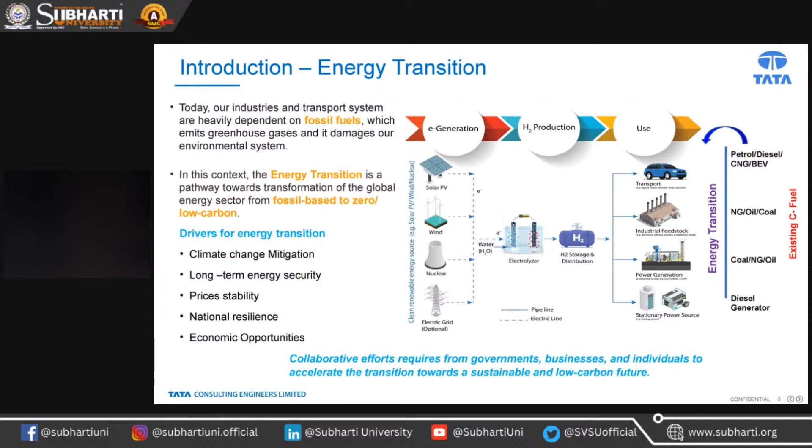So what are the motivations for the energy transition? For example, climate change mitigation; everyone is currently experiencing climate change, so mitigation can be done by energy transition. Long-term energy security, price stability due to geopolitical issues, national resilience is also one of the key driving factors for energy transition, and economic opportunities for domestic growth. These five key parameters are enabling the energy transition.

Here is the key approach for energy transition. Now we understand what energy transition is. What are the key pillars for the energy transition? For example, increase the energy efficiency of the existing energy system, one of the opportunities to reduce our existing carbon fuel. Or, increase renewable energy, for example solar photovoltaic, wind energy, hydrothermal. If we increase this kind of energy, carbon fuel will be reduced.

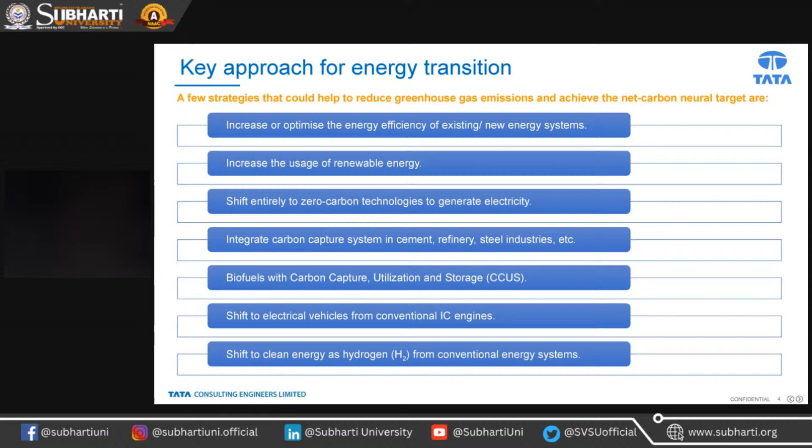Currently our electricity generation is coal-based, thermal-based, or combustion-based, so we should shift to zero carbon technologies. Then, for example, in the cement industry, refineries, and steel industry, plenty of process carbon emissions are happening. That could be captured. Biofuel, with carbon capture, is one of the approaches. Electric vehicles are preferred compared to conventional IC engines with diesel or petrol. Shift to clean energy such as hydrogen. These are the key pillars, the key approach for energy transitions.

Next slide. This is India's target. Whenever we are doing research or contributing, we have to understand what the current problem is and what our target is; then we can initiate our research. In the last two slides, we have seen what energy transition is overall, what the key pillars are, and now, according to the key pillars, what the Indian targets are.

As per the Indian targets, India's 2030 decarbonization target was announced at COP26. The highly ambitious goal includes decarbonizing energy to 50 percent, achieving 500 gigawatts of fossil fuel free generating capacity by 2030. These are the committed targets, but right now we are not near this target. I will explain in the other slides how we are doing.

So we need non-fossil fuel energy of around 500 gigawatts by 2030 to meet 50 percent of the energy requirement with renewable energy. 5 million tons per annum of green hydrogen is needed by 2030. Reduce projected carbon emissions by 1 billion tons by 2030, and reduce the carbon intensity of the economy by 45 percent by 2030, to achieve the net zero ambition for greenhouse emissions by 2070.

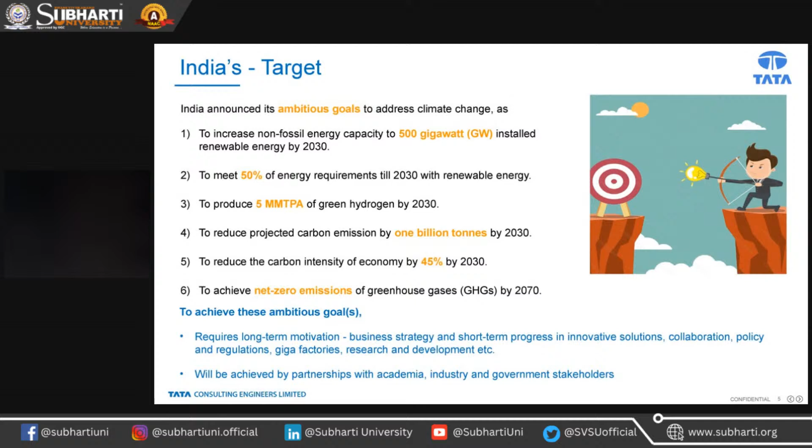These are all the 6 targets India committed to at COP 26. If we want to achieve these goals, we need massive research, collaboration and industrial implementation. So based on this motivation, we will go one by one through how to achieve these things.

So energy transition: now I'm dividing up what technologies are available for energy transition. To achieve the targets I showed in the previous slide, what approaches will there be? These are the approaches we can consider. The first approach is renewable energy, for example solar, wind; nuclear is also considered a clean energy.

Energy storage: batteries, pumped hydro storage, compressed air; green hydrogen through water electrolysis; smart grid; electric vehicles; energy efficiency technologies; CCUS; then advanced nuclear power like small modular reactors; biomass with CCUS, gasification, pyrolysis, transesterification.

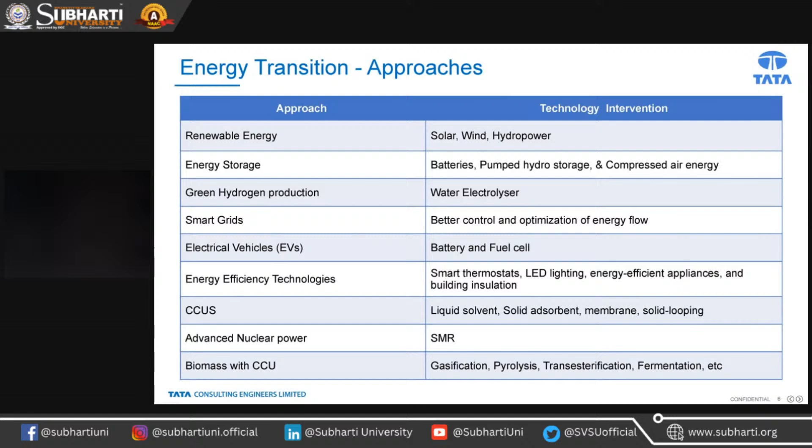See, this first column shows the approach. The second column shows the technology intervention, what technologies are helping us move further toward energy transition. Now that we understand the approach and the technology intervention, we'll go one by one.

For example, we can take solar energy. If you understand the first slide, the next 10 slides I'm going to show in this fashion. First understand the template of these slides, so it's easy to track me. First is the technology: what technology is current? Cell technology or panel technology.

In cell technology there is silicon; most solar cells are developed with silicon and are commercially available. Thin film is also available. Perovskite is under research; some universities are developing it, but it's not at the commercial stage.

So what are the current trends and advancements we should understand in this technology? First, increasing efficiency: it usually improves with research and development efforts focused on enhancing light absorption, reducing energy loss, and exploring new materials. This enables more electricity generation from a given surface area.

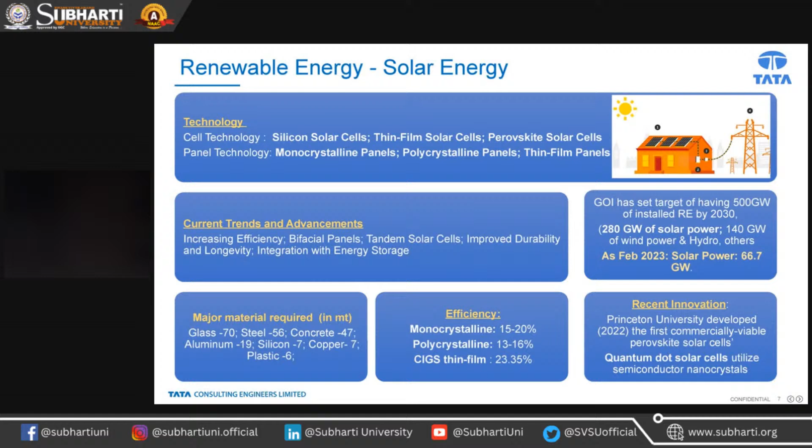Next is wind energy. We have similar technologies: onshore wind, offshore wind, and floating windmill. Types include vertical axis windmill and large three-blade horizontal axis. These are various types of turbines we can use for this technology.

Current trends for windmills: larger turbines, improved efficiency, floating wind technology - these are the preferred current technologies. A small windmill may not give that much efficient operation, so larger turbines with improved efficiency are preferred, along with floating wind. Also integrated energy storage, digital and remote monitoring are enhancing efficiency. This is the current technology for wind.

Currently, as I said, 140 gigawatts is the proportion target, but right now we have only 42.8 gigawatt - this is our current status. However, we have a lot of opportunities to increase that proportion as soon as possible, because many projects are already under construction or in engineering stage. So by 2030, we hope we can reach around 500 gigawatt.

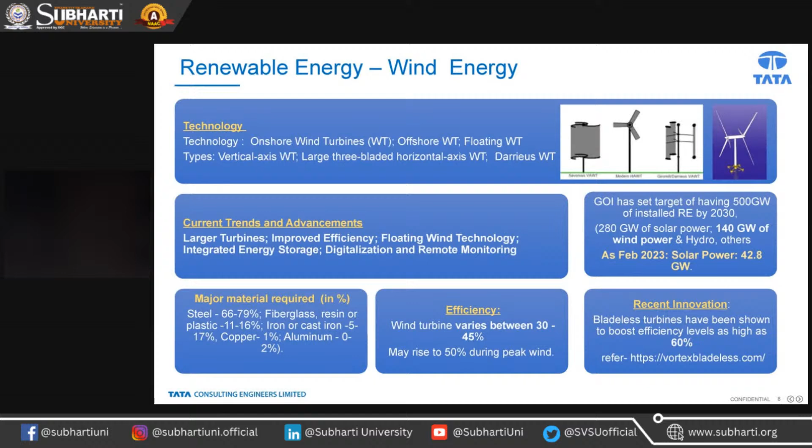Next is batteries. As you know, there are several batteries used industrially for backup power. There's superconductors, pumped hydro storage, compressed air storage, flywheels, thermal energy - these are various technologies for energy storage. But currently we are talking about only batteries; I'm not talking about superconductors, pumped hydro, hydrogen, or flywheel. Here I'm focusing on energy storage as battery.

The types of batteries we can consider: lithium ion batteries, which we mostly use, solid state battery, and flow battery - three types of batteries currently available. The current trend is that lithium ion batteries are trending, but we need a higher capacity device, which includes developing new electrode materials, silicon anodes, high capacity cathodes, and optimizing electrolyte compositions. These are the trends.

India will have battery storage potential of about 600 gigawatt hours by the 2030s - this is our demand. But what are the potentials in research and innovation? Opportunities include liquid electrolytes and solid state electrolytes. Currently we are using liquid type electrolytes for batteries, but converting to solid state electrolytes is a good opportunity from a research perspective.

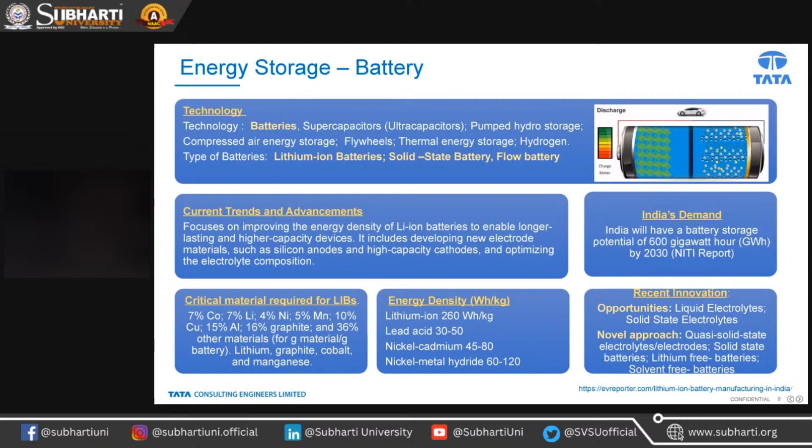Regarding energy density, for theoretical understanding purposes: lithium ion is 260 watt hour per kilogram, lead acid, nickel cadmium - these are the range of energy densities. So these are about energy storage for batteries.

Water electrolysis for hydrogen energy production is also one of the emerging technologies. The last 3-4 years have seen this taken up across all the industries.

They are putting installation. Currently, globally, we can say 300 gigawatts of electrolytic hydrogen production from these methods. For example, these are the technologies: alkaline, proton exchange membrane, anion exchange membrane, solid oxide. These are all technologies almost parallelly maturing, except the anion exchange membrane.

If you want to do alkaline water electrolyzer, around 60% of industrials prefer it for large ammonia production or any standalone large industrial requirement. For small requirement, proton exchange membrane electrolyzers will be used for smaller scales. That's also 40% contributing to current commercialized things.

Anion exchange is at lab scale. We need a lot of potential research on that. Many groups are working on it. Solid oxide electrolysis is also one of these. All four technologies have some merits and challenges, but it will be overcome by recent research. Current trends of advancements are there.

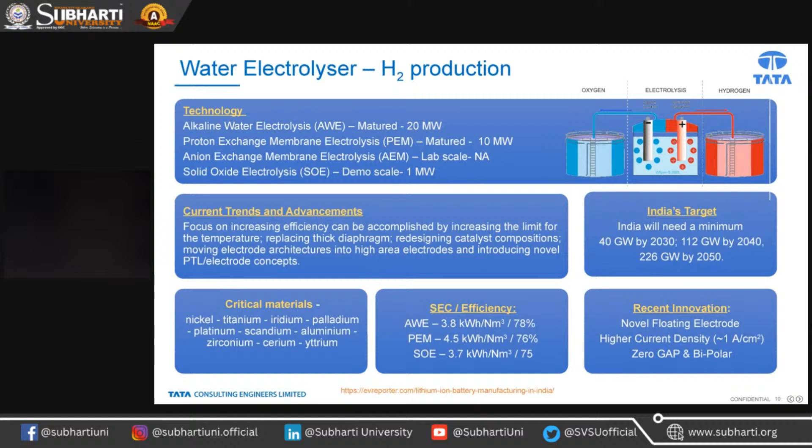Another area is vehicles - electric vehicle, hydrogen-based fuel. This is the automobile industry. Right now, we are currently looking at IC engine-based vehicles. There are two types of fuel: fossil fuel, petrol, diesel, and compressed natural gas vehicles we are using. So here, some companies are emerging with the technology. They're using fuel cells.

Fuel cell means this fuel cell is operating by taking hydrogen as energy input, then converting it to electrical energy. It's producing power that drives the induction motor, and the vehicle is running on the road. So here the fuel cell technologies are low operating temperature fuel cells and high operating temperature cells. Automobile industries are preferring low temperature fuel cells only.

Current trends and advancements - you can see a lot of opportunities in fuel cells. You can say catalyst development, membrane development, durability, longevity. We want to go a long way in this direction.

India status: recently DST and MNRE have funding on fuel cell R&D projects, fuel cell electric demonstrations in different areas, and an HRS under construction in Leh Ladakh recently conducting. So finally, we want to understand, as a researcher, the round trip efficiency.

So we are getting electricity, then converting to hydrogen through an electrolyzer, then hydrogen goes to the fuel cell, then the fuel cell is producing electricity, which is driving the induction motor. The round trip efficiency is only around 42%. So electricity to electricity, we are introducing two devices - fuel cell and electrolyzer - and this is consuming a lot of energy. So we have to think how to improve the round trip efficiency.

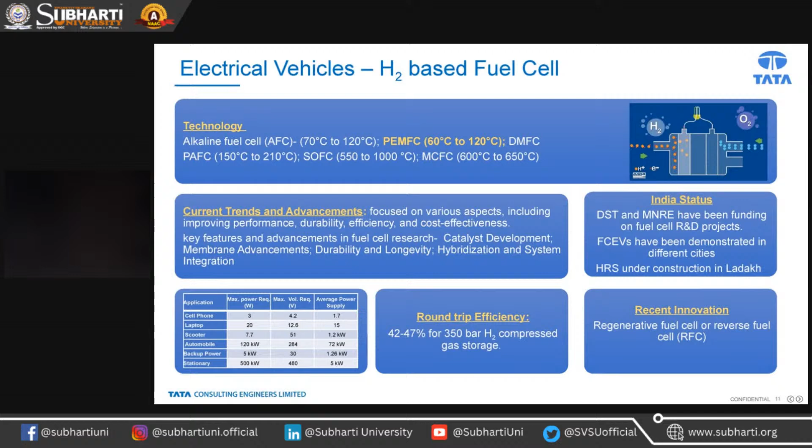A recent innovation is a regenerative fuel cell or reverse fuel cell. This system generates hydrogen itself and electricity also. That is a dually integrated electrolyzer and fuel cell system.

Next is CCUS. One of our targets is already 1 billion tons by 2030. What are the technologies? Liquid solvent, solid adsorption, membrane, solid looping, inherent CO2 capture - these are the technologies. Currently, liquid solvents are dominating, amine based. It's TRL 9, used for many industries - fertilizer, soda, natural gas processing - by various vendors.

So what are the areas to be improved? What improvements are needed? What research is needed for liquid absorption? Think a little bit about regenerative approaches and how to remove contamination in a proper way, checking operation manuals. Solid adsorbent, membrane, cryogenic, solid looping, novel regenerative absorbent membrane - these are areas with a lot of opportunities.

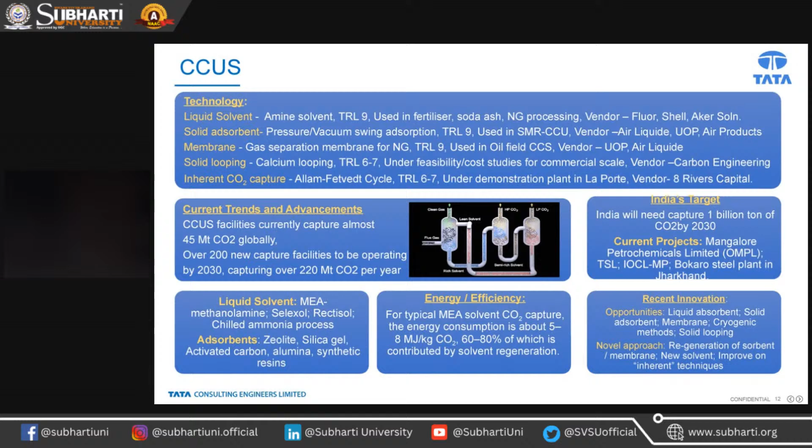We also have to look at the trending trends. Another two decades and we will still be discussing carbon capture. Small modular reactors - this kind of research should be done mainly from the public sector, as it is specialized.

What modular reactor means is a nuclear reactor. Conventionally, a nuclear reactor is 1,000 megawatts - that is a regular reactor. Small modular means up to 300 megawatts; the size is reduced.

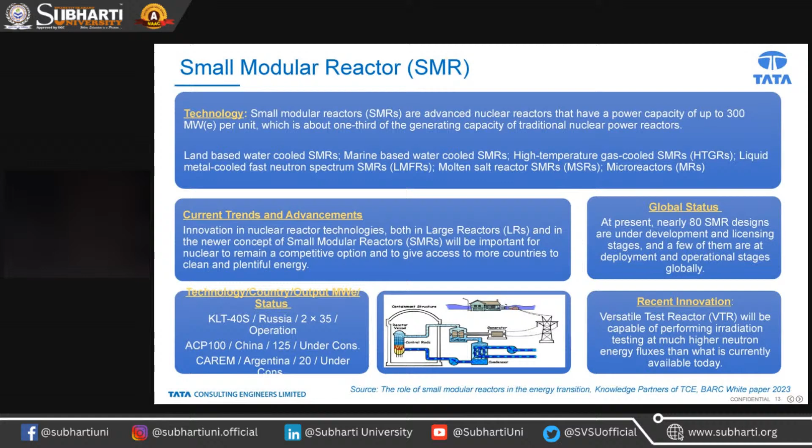Recent innovations include jet fuels from industrial waste, algal turf scrubbers. This is one of the recent innovations happening across the world.

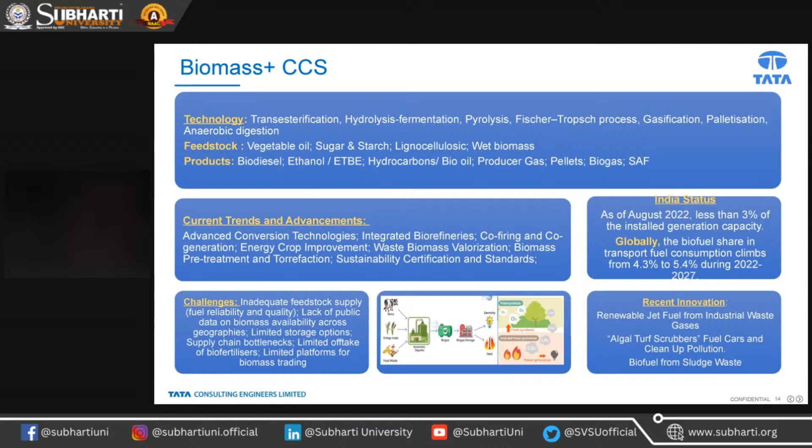Next, I'll consolidate here. Thank you so much. So far we have seen all the key parameters and key contributors to energy transition.

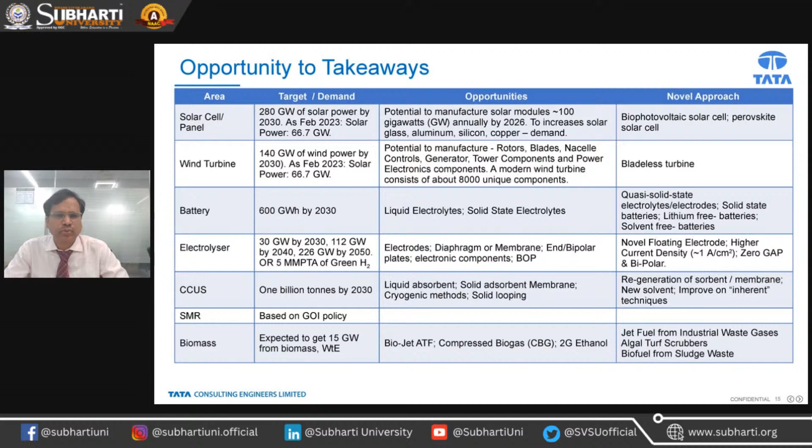You can see solar cell panels, windmills, batteries, electrolyzers, CCUS, SMR, biomass - these are the key areas we have covered, including the technologies, current demands, material requirements, current efficiency, and what needs to be done for future innovations.

I have consolidated all the slides here into one slide showing targets and demands. You can see our Indian demands by 2030 are very near to us. Each opportunity I've consolidated here.

For example, CCUS: liquid absorption, solid adsorption, membranes. For batteries: liquid electrolytes, solid state electrolytes - these are mandatory areas for respective research teams to look into. As already discussed, novel approaches for biophotovoltaic solar cells, bladeless turbines for windmills, and solid state electrolytes and electrodes are the main criteria we are taking from this.

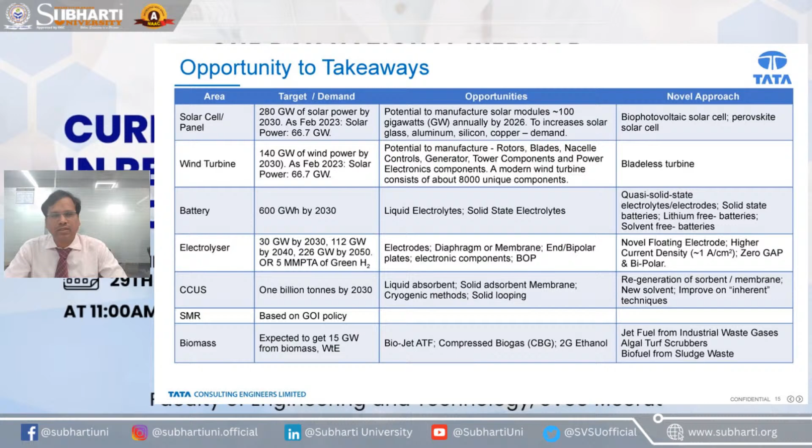Thank you so much. If there are any questions, I am happy to answer them.

Thank you so much, sir, for enlightening us. Thank you, sir. It will definitely help us in the future.

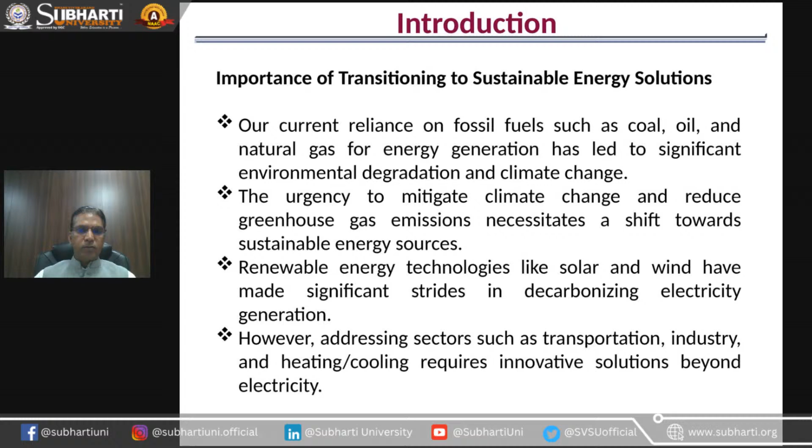Why the role of hydrogen in the energy landscape? Because hydrogen is the most abundant element in the universe and also holds great potential as a clean energy carrier. It is also called a zero emission fuel when produced from renewable sources. As a clean fuel, hydrogen offers a pathway to decarbonize sectors that are very difficult to electrify directly, such as heavy industries, long haul transportation and heating applications.

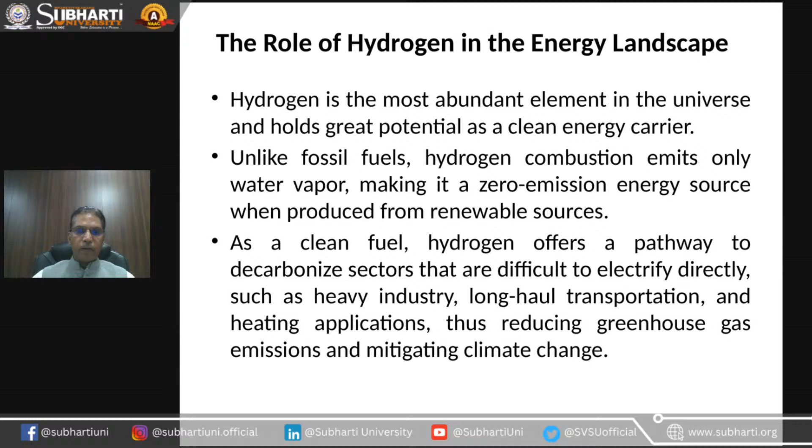So from this figure, you will understand why hydrogen is a necessity and why it is very important. You see, this is an excellent energy carrier, which has a great capacity of 142 megajoules per kg of energy, which is very high compared to the rest of the fuels. It is also clean energy with zero greenhouse emissions, because when it burns in contact with the air, it emits heat energy with zero greenhouse emissions, and it comes from diverse domestic sources.

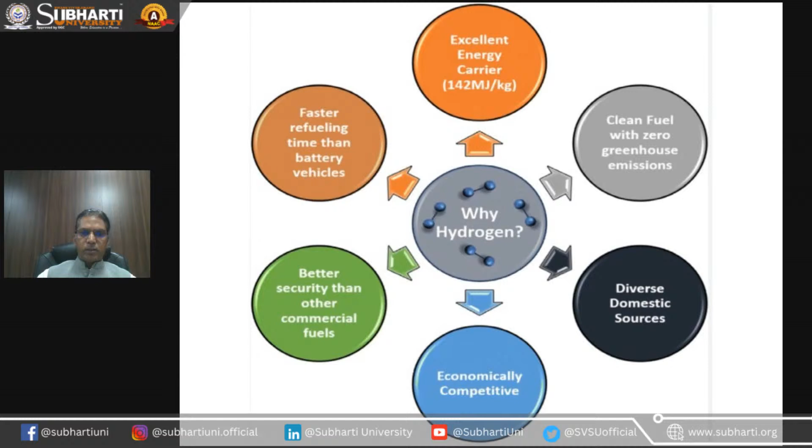So if you see many of the sources which are burning right now in our country, for example in Rajasthan we have NPCL in Kota. So we had to take care whether the electricity generated from these places had to be transferred to so many places in Rajasthan and many other states. But the problem is this is not economical right now. So we need better security than commercial fuels. What is rightly required is hydrogen, coming as the best fuel source of the future. This will give you a glimpse of the supply and demand of the world in the energy scenario.

So on the left hand side, we see that currently we are using these fossil fuels, which mainly consist of coal and natural gas and refinery products. If you see what the energy world is seeking in terms of renewable energy sources, we have listed them. From biomass, solar to hydro or marine energies, these are renewable energy sources the world is currently working on, but they need more research. On the nuclear side, we are working on this area too. The Government of India and many other world energy centers are working on nuclear energy.

And if you see the bottom of those figures, this is mainly used for portables, transportation, buildings, and industries. These are the areas where we really need portable energy sometimes, because this energy is also demanded by industries, small industries. But again, the problem is we cannot generate energy at a small level at some places. So hydrogen comes with so much importance, with immediate roles to fulfill this demand of the world and the industries as well as the transportation sectors.

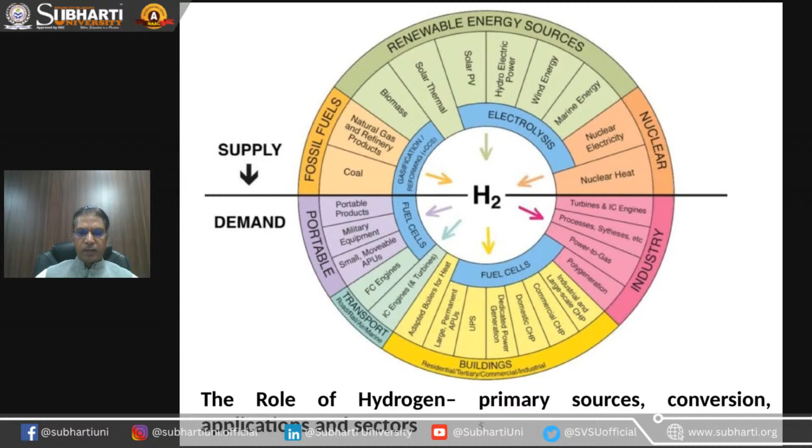So we were talking about this supply and demand. It will largely be required by the industries as well as for transportation. An energy carrier which has a large energy capacity, but has a lower production cost. So in this area, we were talking about the thermochemical process. In water splitting, this is renewable.

Most of the industries are currently working on this area. Many R&D groups are working on this area, some portions of which were covered by Dr. Shakti. We are talking about the alkaline, PEM fuel cell and the solid oxide fuel cells.

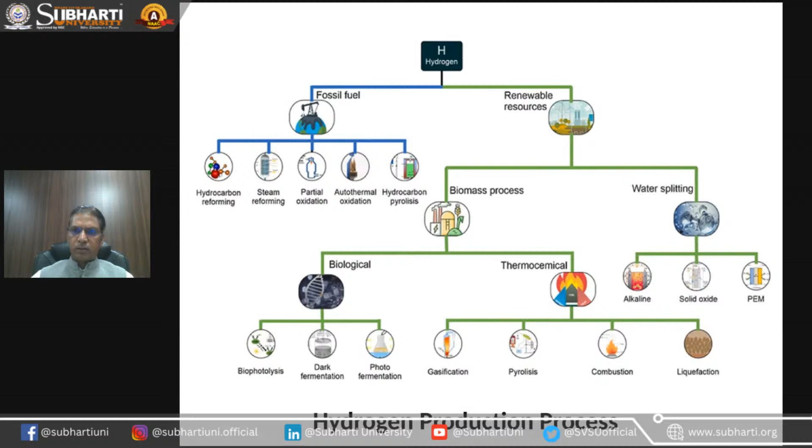There is one other sector which is working on water splitting through semiconductors. In this, water is split into hydrogen and oxygen on semiconductor plates, which will give you enhanced recovery. But the problem is it only has 13.7% efficiency currently, so it's not a cost effective process.

Presently we have a lot of processes, such as steam reforming and partial oxidation. But the problem with all these processes is that a large amount of CO2 is produced. This is a major disadvantage of these fossil fuel processes.

If you see the electrolysis process, photofermentation or the thermolysis process, the good thing is they are not polluting, they use renewable sources and proven technologies. The only drawback is lower efficiency and the higher capital cost associated with electrolysis or the renewable energy process.

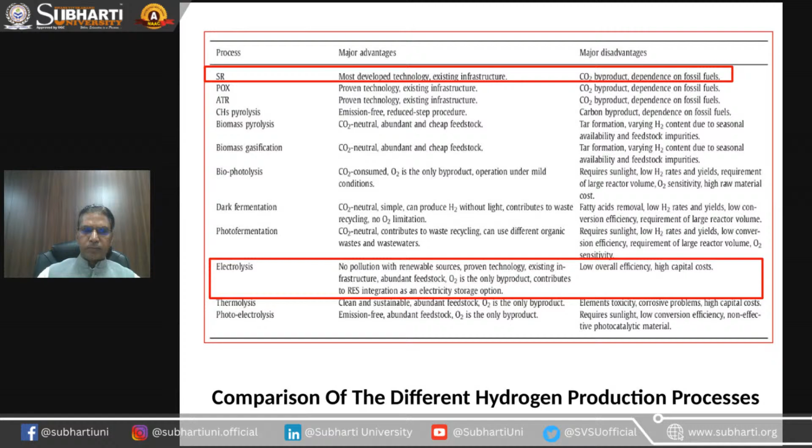This will give you an idea about the steam reforming process, which is commercially available. The efficiency of this process varies from 74 to 85%, and it is normally used and a mature process.

But on the renewable energy side, presently the industry is using alkaline electrolysis and PEM electrolysis, which are commercially used and require electricity and water. That means you need only two things, with an efficiency of 60 to 82% in some conditions. Other solutions are not commercially viable right now, but some research and advancements are currently used in different industries.

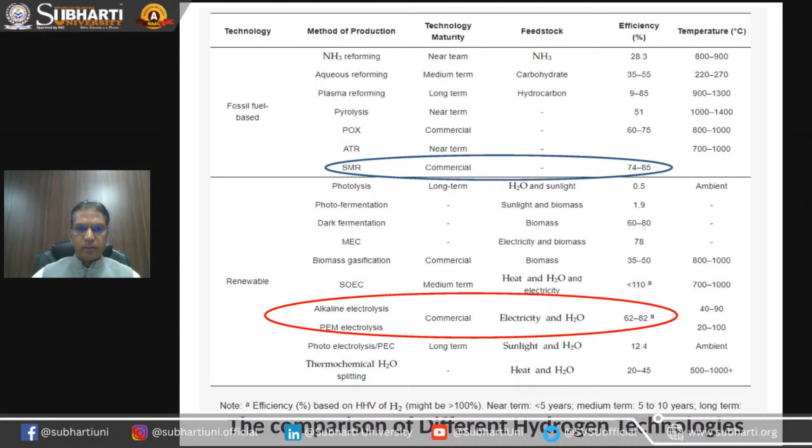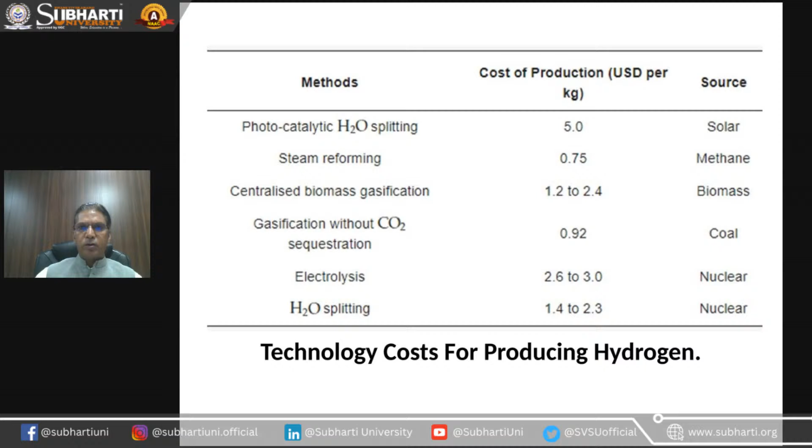In the case of electrolysis, the cost varies from 2.6 US dollars to 3 US dollars, which is almost 4 or 5 times that of steam reforming. So we need to work out how we can improve the electrolysis or water splitting process, so that we can reduce the cost of green hydrogen.

This will help you understand why we are working on this hydrogen process. Currently the whole world is working on natural gas production and distribution. The problem is that around 25% of the CO2 emitted into the environment is from these sources. Almost 11.9 kg of CO2 per kg of hydrogen is produced from this process.

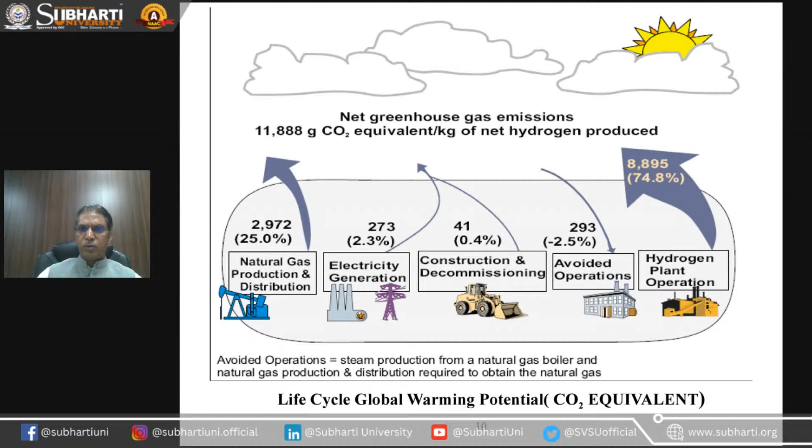If you compare electricity generation, construction, decommissioning and operations, a large amount of CO2 is generated from the hydrogen operation plants alone, which is very harmful for the environment. So everybody started working on this so that we can reduce the CO2 from the hydrogen production process.

Ultimately, we are moving from hydrogen to green hydrogen. Everybody in the world is talking about green hydrogen. So why are we going for green hydrogen as a sustainable alternative? First, green hydrogen is solely produced from the electrolysis process, powered by renewable energy sources, emitting zero emissions throughout the production process.

We are working on solar, wind, and the green hydrogen process, which can be carbon neutral, even carbon negative. This depends upon the sources.

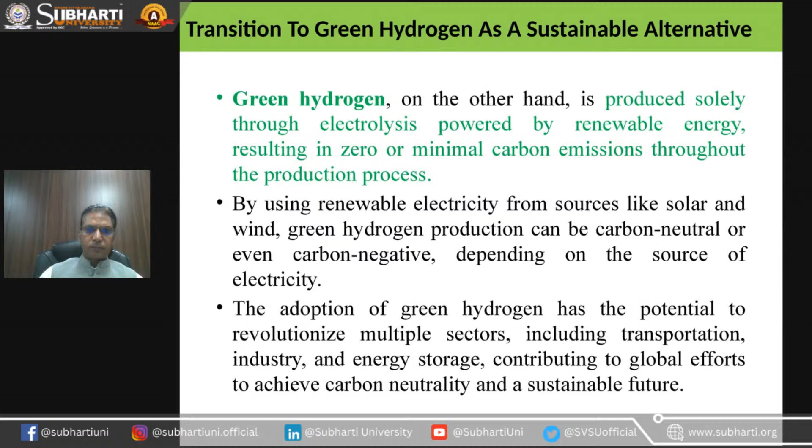We can easily differentiate because they are green hydrogens. So the key difference is from the green hydrogen to the black hydrogen, blue hydrogen, and the yellow hydrogens. So there are distinguishing differences between all these hydrogens. So if you see, black hydrogen is produced from the conventional sources of fossil fuels. When it comes to the gray hydrogens, it is produced from the SMR process, but without any carbon capturing, so significant carbon emission is produced from this.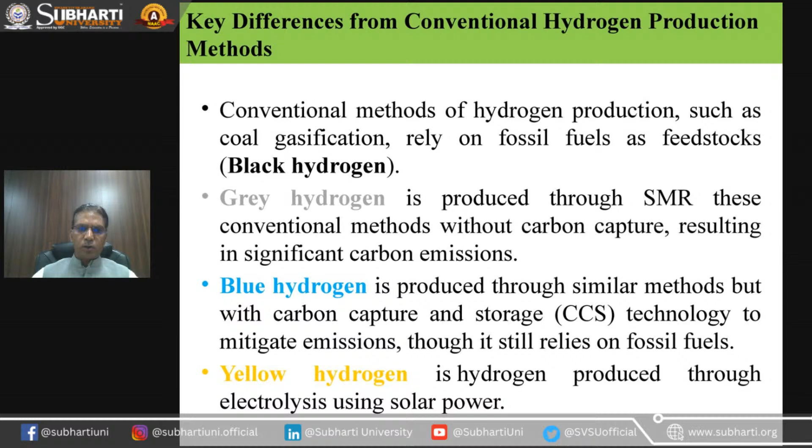So if you see blue hydrogens, it is from similar methods, but with carbon capture in the storage process. If you think about the yellow hydrogens, it is produced through the electrolysis process, which is powered by solar power. So this will give you an idea. Renewable energy-based is called the green hydrogens.

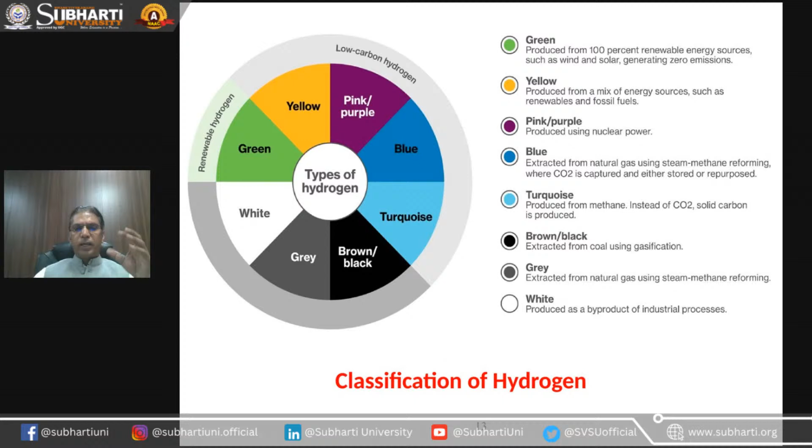We have yellow, pink, purple, and turquoise as the low carbon hydrogen production processes, and the gray and the black are called the fossil fuel generated processes, which are highly emitting of CO2, and the white is produced from the byproduct of the industrial process. So these are the main classifications of the hydrogens.

We will talk about how the green hydrogen is produced from the various methods. So mainly there are five methods we are working on in this area. First is the renewable electricity powered electrolysis, which is the proton exchange membrane electrolysis and the alkaline electrolysis. We are not going into detail because Dr. Shaktivel has also covered all these areas and what things are required for this.

Solar power electrolysis, where we need solar power, and the energy from the solar is used in the electrolysis process, and that will help you to produce the hydrogens with zero emissions. Similarly for the wind power and the hydropower, and the last one is biomass power, which will produce hydrogen from renewable energy sources at large scale even in the country.

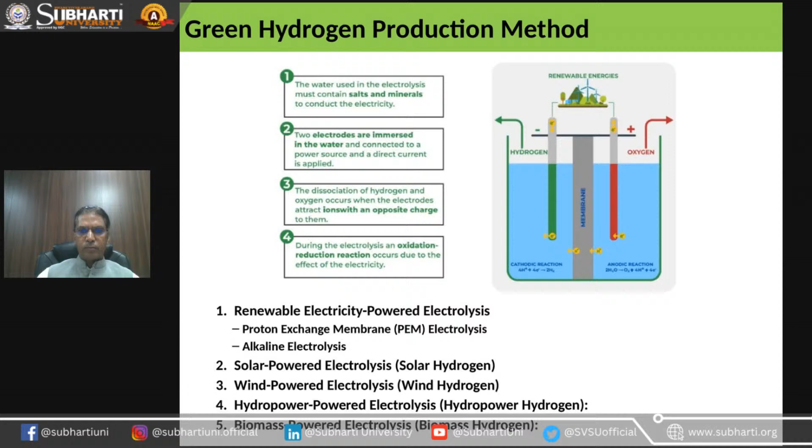So if you see the technological advancement in green hydrogen production, continuous research and innovation is going on, but we certainly need efficient and cost effective methods so that it can be scalable at large scale. For this, a large amount of R&D is also required and going on in electrolyzer design and materials, which give comparatively higher efficiency for converting electrical energy into hydrogen gas.

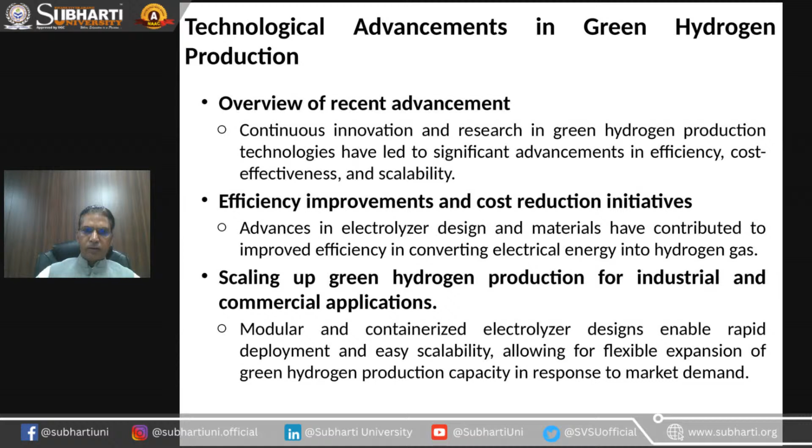So unless we scale up this hydrogen production for industrial applications, this R&D will not be enough, but R&D is working on this area, which will be helpful for the commercial application of hydrogen production. So this is how we can evaluate hydrogen production by electrolysis.

We can say the four parameters, in which we are talking about the electrode and photoelectrode materials. So based on the efficiency of the photoelectrode and the photoelectrode materials, we need higher efficiency, because right now the photoelectrodes and photoelectric materials have an efficiency of only 17 to 18%. It should be higher, around 30%, so that it can be feasible and viable for the generation of hydrogen.

Secondly, the techno-economic aspect should also be covered, so that the technology is cheaply available and economically viable, so all the industries working in this area can use this hydrogen generation technology for their implementations.

Definitely one of the important factors is the environmental aspect. So one good thing about hydrogen generation from renewable energy is it is a zero emissions technology. So when we are working on zero emissions, we are always on the positive side. We are not going for the negative aspects of the environment. So in the case of renewable energy sources or water electrolysis for green hydrogen, it is the most important and environmentally friendly technique.

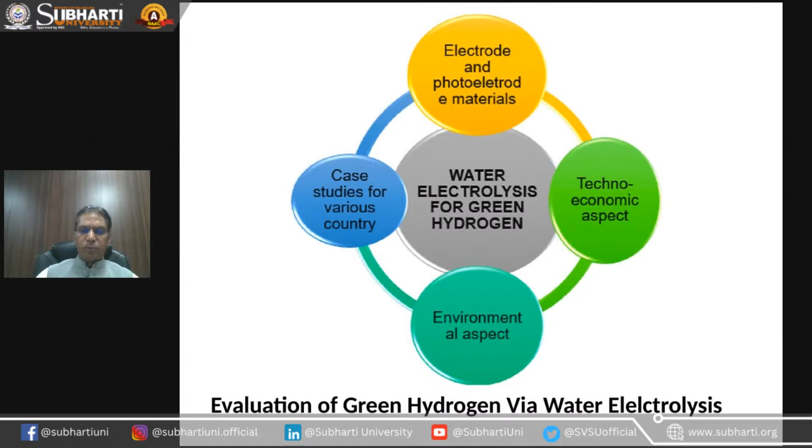So various industries and various countries are working on this area, where case studies are being taken on how much electrolysis is used for generation of green hydrogen from various sources. We can take one good example: the recent use of ammonia cracking by this hydrogen process at commercial scale.

So if you see, from the renewable energies the electricity is generated, and this electricity will help you for ammonia production. The renewable electricity is converted to hydrogen, and air is used for air distillation, which together form ammonia.

So this ammonia is again stored in storage plants, and then transported wherever it is required. Through thermal ammonia decomposition and the ammonia decomposition process, it is again converted to hydrogen, which goes to the refuel stations and can be used for domestic and transportation purposes. So the overall scenario shows that, starting from the renewable energy to the end of this process, everything is a zero emission process.

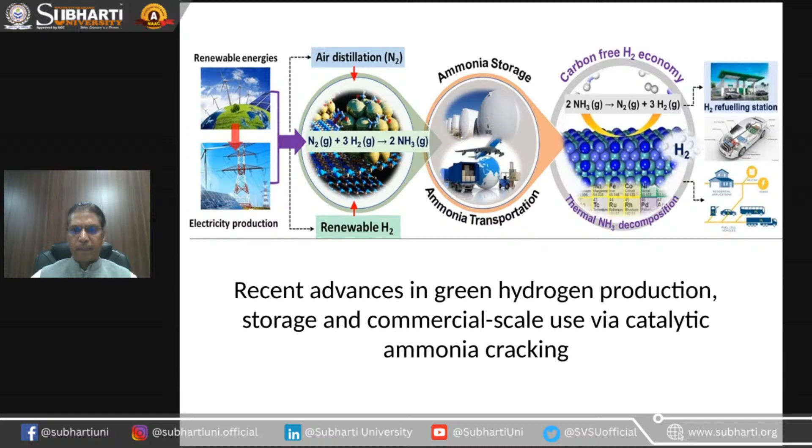So, in detail, my previous research has already talked about the physical and the material-based hydrogen storage. The physical-based ones are compressed, cold compressed, or liquid hydrogen. And for the material-based, work is currently going on with different kinds of metal hydrides, adsorbents, liquid organic, and chemical hydrogen, and complex hydrides are used by various industries for efficient hydrogen generation and hydrogen storage.

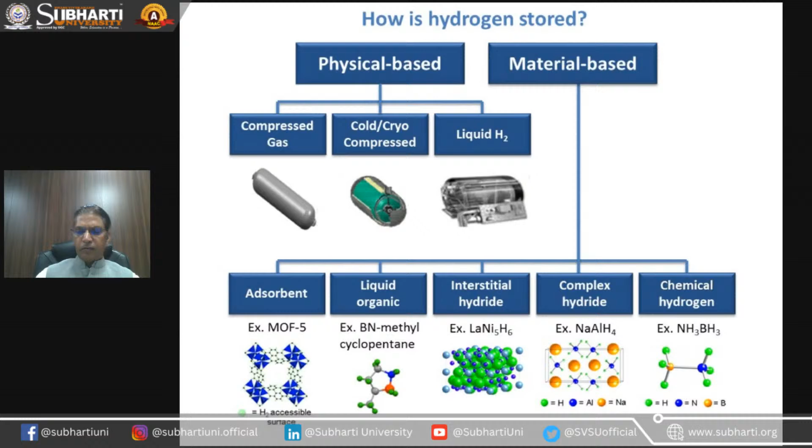Transportation with fuel cells is currently being developed by various industries. Even the Ministry of Renewable Energy is working in this area, presently on different zero emission transportation sectors. You can see that from Tata to many current transportation industries are working on e-cars, e-buses, and e-sectors, which will definitely have a positive effect on the environment.

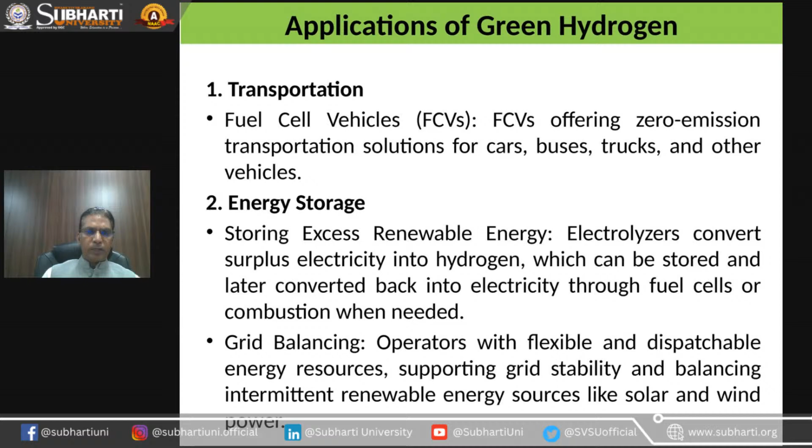Energy storage handles the excess renewable energy. Electrolyzers convert this energy to hydrogen, which can be stored and later converted back to electricity wherever it is required. Another important point is grid balancing. It provides flexible and dispatchable energy resources, supporting grid stability and balancing intermittent renewable energy sources like solar and wind power.

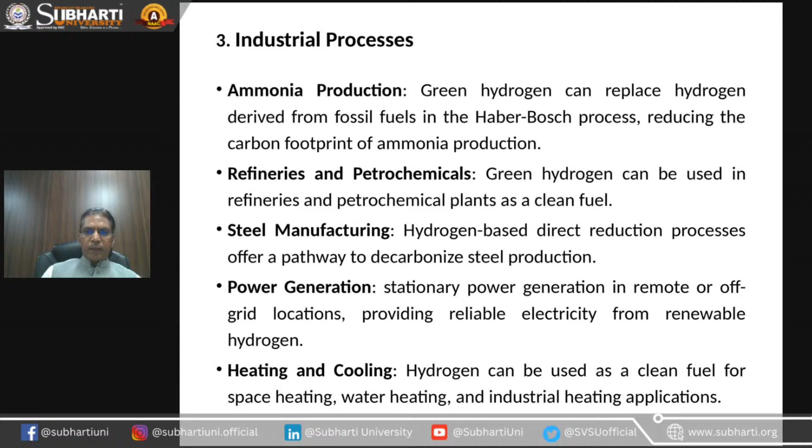If you look at the industrial processes where it is required, as we have already covered, there is the ammonia production process, refineries and petrochemicals, steel manufacturing, power generation, and heating and cooling systems, where green hydrogen will help the industries by providing reliable electricity from renewable hydrogen energy.

On the left hand side, you can see the pros, the advantages of green hydrogen: it is 100% sustainable because it is formed from renewable sources. It is storable, it is versatile, it can be used in small amounts at various places, and it is transportable. But the disadvantages, which various agencies are currently working on, are that it has a higher cost, the energy consumption is very high, and safety is also a big concern for the environment, for transportation and for consumption. Still, because it is environmentally friendly, it can be used.

It gives job opportunities, innovation, and economic growth, and energy is one of the sectors where India needs energy security. So it will help India have good energy sources and reduce the dependency on fossil fuels.

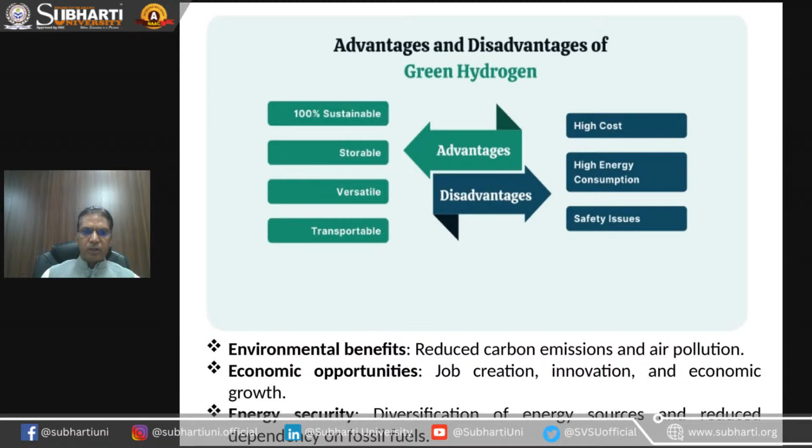So, as we have already talked about, green hydrogen has its promises and challenges, because green hydrogen is basically part of the decarbonization plans of many countries, since the combustion of hydrogen releases only heat and steam. In India, 60% of energy comes from fossil fuels. So India has targeted by 2030 to reduce this, shifting 60% the other way, to renewable energy processes.

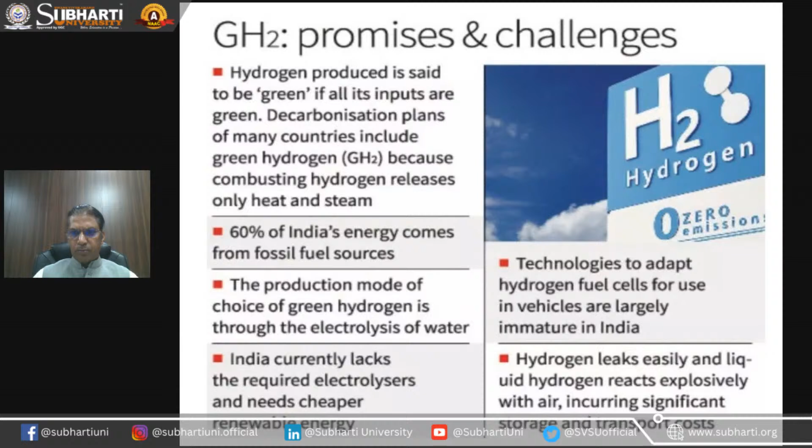At present, we are working on the electrolysis of water, where research is going on, and DST, MNRE, and many of the big centers are working on how we can provide this energy to various sectors, at the commercial and lower levels of industry. But currently, as we are talking about, it has significant problems because it is presently less economical in these areas. Here is a smaller case study of the steel sector.

Currently, the energy consumption of the steel sector is 33 exajoules. So if we are seeking this target, for example in 2050, there are three areas we can definitely work on. First is innovative design, which is needed to produce new products that lower the energy requirement, to 21.6 exajoules. So in a 1.5 degrees C aligned steel sector, compared to the 33 exajoules, we can reduce 25.5 exajoules of energy by working on these three areas. We can use steel circularly to reduce the need for new steel, and redesign for the most efficient production process.

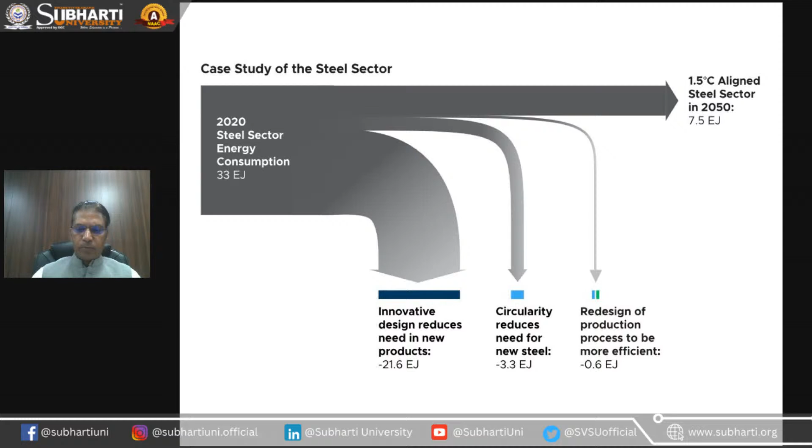So we are here today. So, for example, we are in 2024. So if you see the hydrogen production timeline, which is ready to deploy by 2027, 2047, the Ministry of Transportation is working on this area.

As we already know, some of the medium and large size vehicles have started working on hydrogen energy, and even for trains, the Ministry of Railways is also starting to work in this area. So we are in an age where medium size cars and vehicles are using green hydrogen energy.

If we are going to reduce these powers and have these implementations, definitely we will work toward 2047, where we can say that after 100 years of independence of India, we are converting from fossil fuel to the renewable energy sectors of the country. So there will be less dependency on fossil fuels.

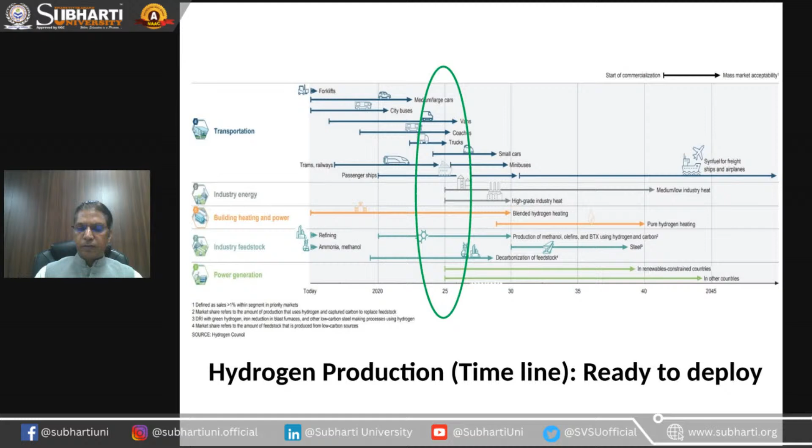So we use hydrogen as a fuel and energy carrier, which serves the national strategic goals: energy security, environmental security, and international competence. That will cover all three aspects where these goals immediately need to be approached, and by covering all the sectors, we can be sure that India can have energy security by 2047.

So you see that the Green Hydrogen Mission is silently working. R&D is working, R&D in public and private partnership, or hydrogen partnership, has started working. You can see even small and pilot scale plants in steel and heavy industries working on this, and storage and shipping is also working.

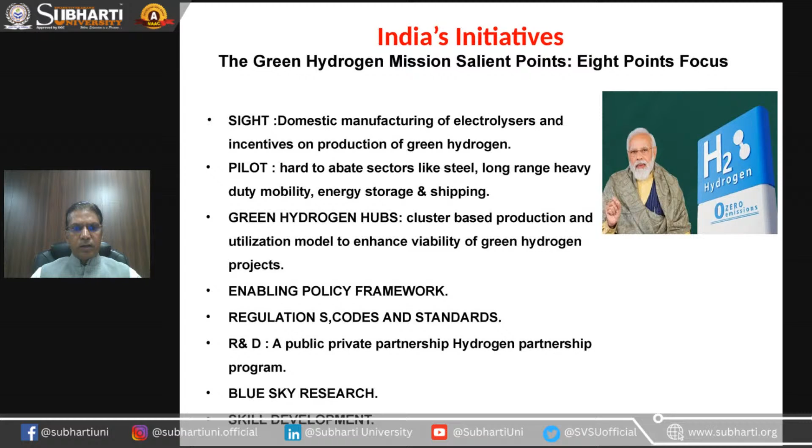Pradhan Mantri Modi ji has also worked on the cluster-based production and utilization model for enhanced viability of hydrogen energy projects, which is the national vision process. And you can see the enabling policy framework on green hydrogen and the emission process.

So we are moving towards sustainable mobility, where the green hydrogen-based society is working with auto manufacturers, universities and technical schools, because IITs, NITs and many research organizations are working at these levels where human resources or HRD is working.

How hydrogen production plants can run through renewable energy sources, how it can be stored, the technology, and what the basic research is working on. So R&D is also working in this area. If you look at the general public, we need public awareness of how we can go from fossil fuels to hydrogen energy based societies.

As we have already talked about, the fuel industry is working on hydrogen production, distribution, and hydrogen storage technology. But it requires basic infrastructure, which is going to be covered maybe in the coming years. So the government has a mixed strategy and has codes and standards for green hydrogen production, so that it can be a win-win situation for the environment as well as India.

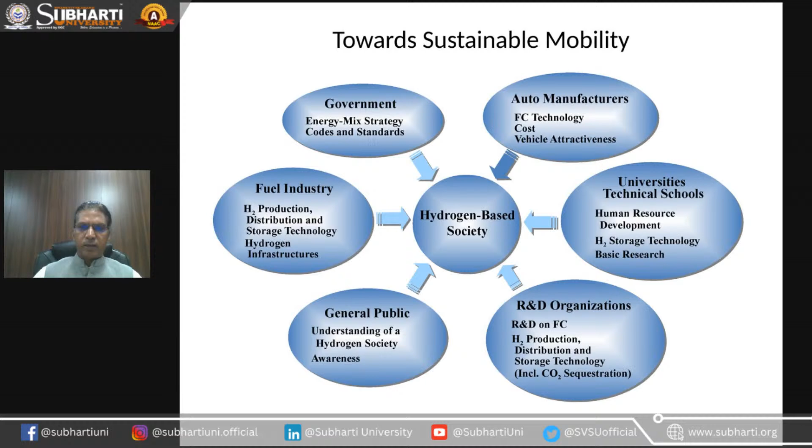So I can say that green hydrogen is one of the promising technologies and the most viable clean energy carrier for the near future. But simultaneous research work on improving hydrogen production efficiency and technological suitability is required, so that it can be a good viable option for industries. This energy provides emission-free technology, and technological advancement is only possible when it is used with renewable energy hydrogen production technology.